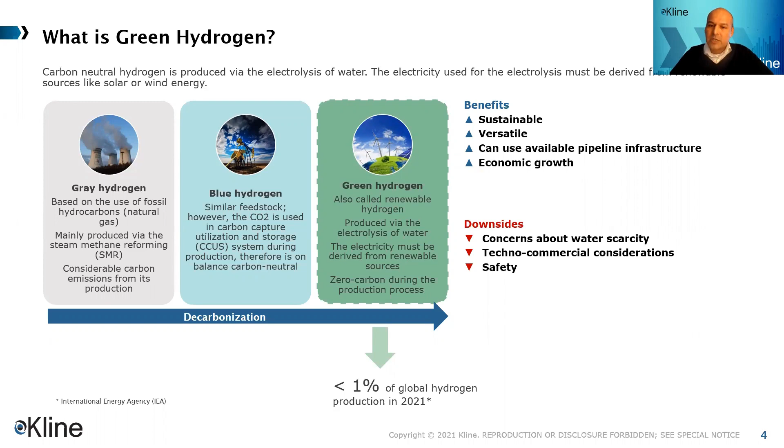That small production is what motivated European Union authorities. The EU has the firm determination to change that—to improve and increase that 1% or less of green hydrogen production. This is centered on their Green Deal, a renewable, more sustainable economy the EU aspires to have by 2050, to become carbon neutral.

At the first stage of this mega trend project, efforts would center on creating supply—building electrolyzer capacities expected to be about 6 gigawatts through 2024, and 2 times 40 gigawatts by 2030. Half of that would be in EU countries, and the other 40 gigawatts are planned for countries outside the EU, essentially Ukraine and Northern Africa.

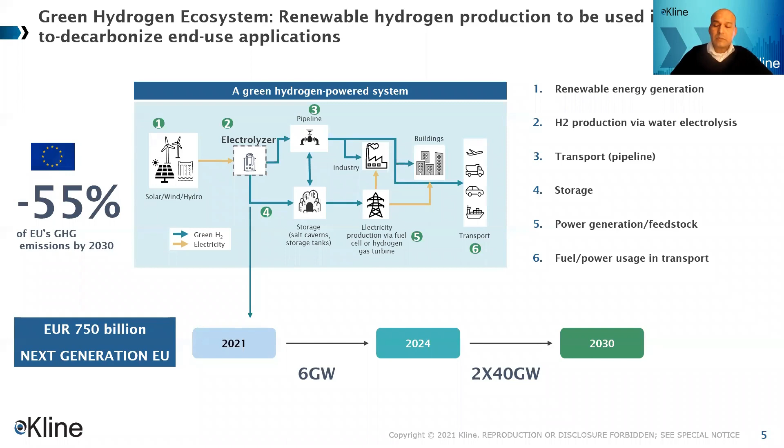Moving to the next slides, I'd like to give different answers on whether those projects are doable, viable, or could be materialized. Given the high level of uncertainty, we have around three different types of scenarios.

The base case scenario, shown in the upper left bar chart, in the middle, is basically assuming full implementation of current and future projects related to green hydrogen production within the EU energy transition framework.

Assuming all that happens, the base case scenario counts on production of 10 million tons of green hydrogen by 2030, shown in the right upper chart, and about 50 million tons of green hydrogen by 2050. This is quite a challenge, and our preliminary estimates indicate that an annual capacity of about 50 gigawatts will be required to meet those targets.

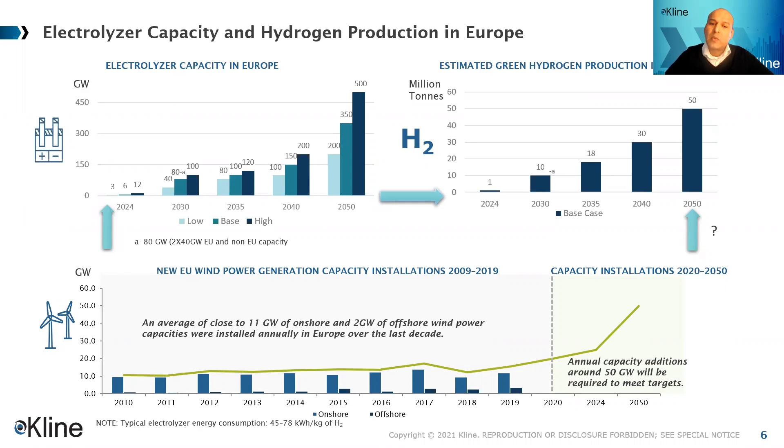We are talking about only the additional capacity coming from wind turbine energy. This is quite a challenge, and as you can see in the bottom of the chart, you can look at the annual average addition of wind energy in Europe over the last decade. It's just been about 11 gigawatts of onshore and 2 gigawatts of offshore wind turbines. So certainly that's not a really easy task.

However, the European Union, with these announcements and these very ambitious plans, have created propitious market conditions where we can see that already some changes are happening. That's created a lot of interest for a diversity of stakeholders participating in the market, embarking on a number of projects and consortium platforms in a concerted effort from different players, from private entities, energy companies, utility companies, all gathered under one single umbrella of a European Union institution.

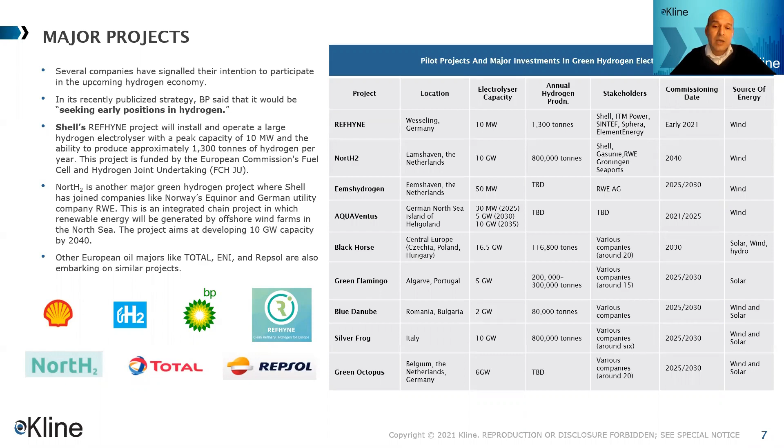Interestingly enough, some of those projects have been named after a color or after an animal. So you can see here in the tables projects like Black Horse, Green Flamingo, Silver Frog, for example.

And now, what is really the impact of green hydrogen energy, and what is going to happen when they are used by those different types of end users? That's important for us from the perspective of the finished lubricant market standpoint.

So there will be, as with anything, a coin with two faces, a positive and a negative one. On the negative side, we could expect a market contraction that's already happening, especially in areas like industrial lubricants, where we see a declining trend, basically happening because of the transition from thermal generation to renewable power generation and related operations like coal and coke mining, for example.

In the area of automotive, we can see that green hydrogen applications and fuel cell vehicles, which I'll show in the next slide, will also have the potential to eliminate the use of certain early adopting, early decarbonizing sectors, as in the case of freight trucking, and especially in the case of engine oils and heavy-duty motor oils.

On the positive side, I think that will be of interest for most of the audience. We have a growth that will be not only in terms of volume, but also in terms of value. In terms of volume, we'll see generated amounts of synthetic products related to the production of renewable wind and solar energy that will be needed for feeding those electrolyzers to produce green hydrogen.

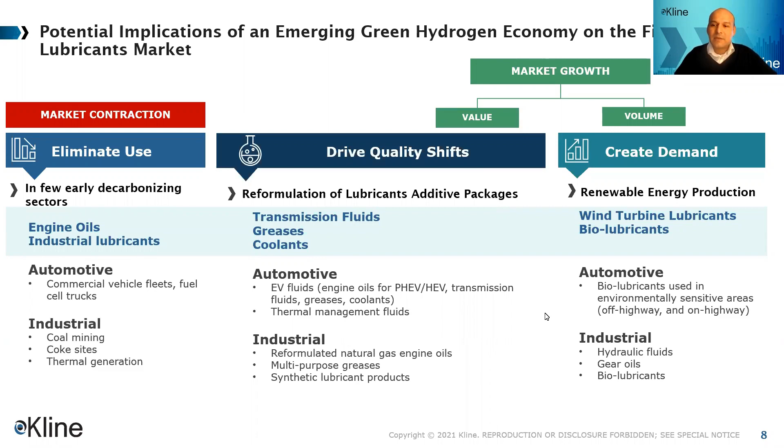Power generation's market pull is not as high, but the technological barrier is less of an impediment. Nowadays, hydrogen is already being used together with natural gas in blends for power generation.

The second end use is trucking. Fuel cell vehicles are already available, and it's a mix of market pull because of corporate social responsibility policies and also a level of subsidies or incentives.

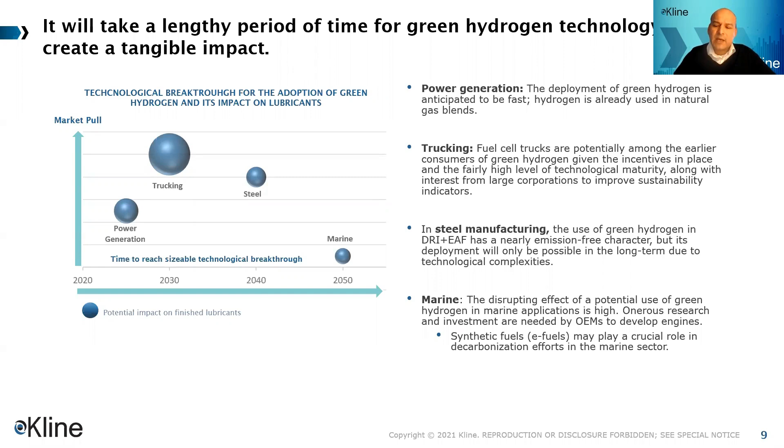The last two end users we assessed are steel and marine, and we believe those will be the laggards adopting green hydrogen in a later phase, mainly because of the technological challenges it poses. In most cases, our expectations are aligned.

Now let's look at each individual end use and the immediate effect of green hydrogen. In the case of natural gas, that's not new—natural gas together with hydrogen has already been used in power generation. The only thing is the level of participation of those plants is still low, from 10 to 20% green hydrogen, with the rest being natural gas. But the ultimate goal is to increase the proportion of hydrogen in those plants.

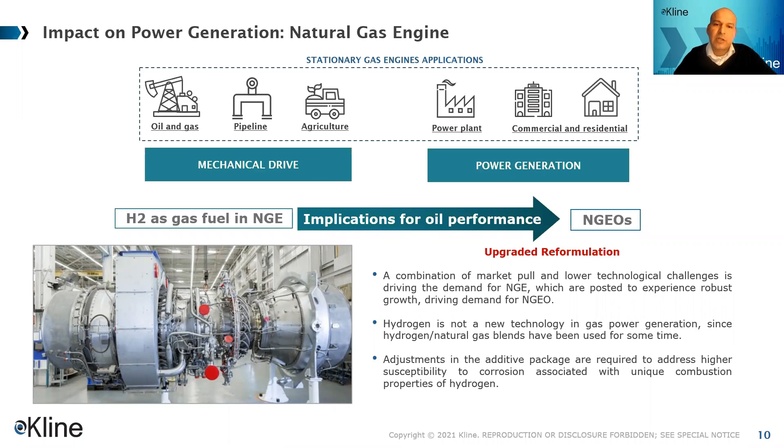When it comes to the technological complexities related to combustion and flammability issues with hydrogen, we anticipate it may be necessary to reformulate natural gas engine oils to tackle corrosion considerations and fix or tweak the additive packages used, especially because hydrogen combustion is clean and lean and won't lead to soot formation. Therefore, we'd expect less need for detergent or dispersant additives.

Secondly, we have trucking, an area of high interest. Again we see two sides. On the positive side, it will require a number of dedicated EV fluids targeting thermal management and better protection of different pieces and powertrains.

On the negative side, our estimates suggest about 10 to 15 kilotons of heavy-duty motor oils could be lost due to increased penetration of hydrogen-powered fuel cell vehicles, expected to be around 45,000 in 2030, but that number is expected to increase to 500,000 by 2050.

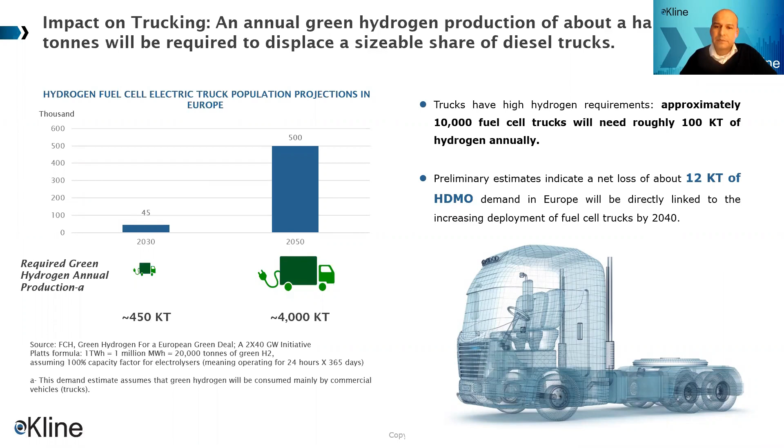In case of steel manufacturing, we analyzed this area because it's a very hard-to-abate technology. The impact on lubricant demand is not expected to be significant, just because the process of iron making and steel making is less lubricant intensive.

However, there will be some changes, indirectly connected to the deployment of green hydrogen, mostly associated with or derived from the equipment changes accompanying the shift from coal to green hydrogen.

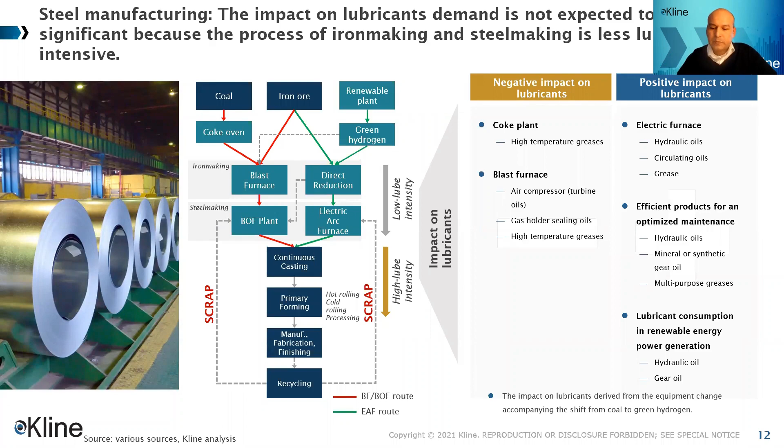One of the winning areas is wind turbine lubricants, because, as mentioned before, there will be enormous amounts of new onshore and offshore wind turbine energy necessary to feed the electrolyzers. We've calculated that about 1 to 2 kilotons per year will be needed for wind turbine farms.

Another indirect market that could benefit is biolubricants. Offshore wind turbine farms are expected to have the biggest demand or growth because of land shortages and environmental situations. Green hydrogen based on offshore wind turbine farms is expected to really expand, operating in North Sea areas. This can create demand for biolubricants because of international convention agreements protecting aquatic and oceanic environments.

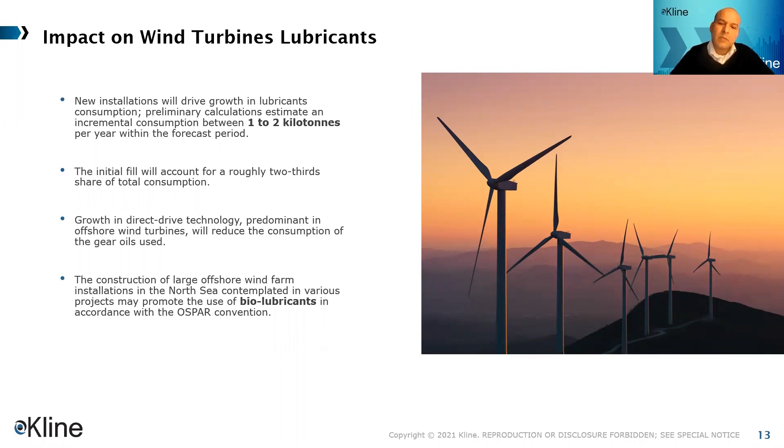In the case of marine, the last end use we analyzed, this market is still far away for green hydrogen, for many reasons. One of the most important is the enormous investment necessary to change OEM equipment in a highly regulated market, and green hydrogen is also competing with alternatives like biofuels or methanol.

Synthetic fuels based on green hydrogen seem to be a more viable alternative, not as fuel cells, which are already being used for small coastal vessels or onboard engines, but not yet at the largest scales.

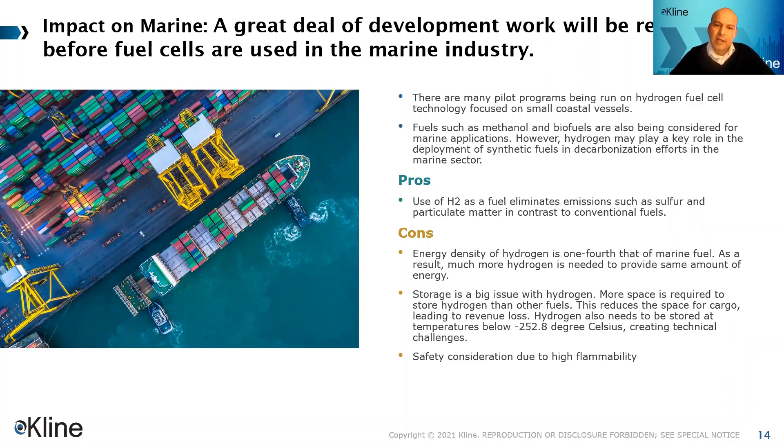Having said that, the core part of the presentation today is basically covering or focusing on Europe, but the green hydrogen energy revolution is truly a global phenomenon. So I would be more than happy to share some insights of the green hydrogen revolution for other regions in the world in the near future. You can see here what are the major undertakings being planned in different regions of the world.

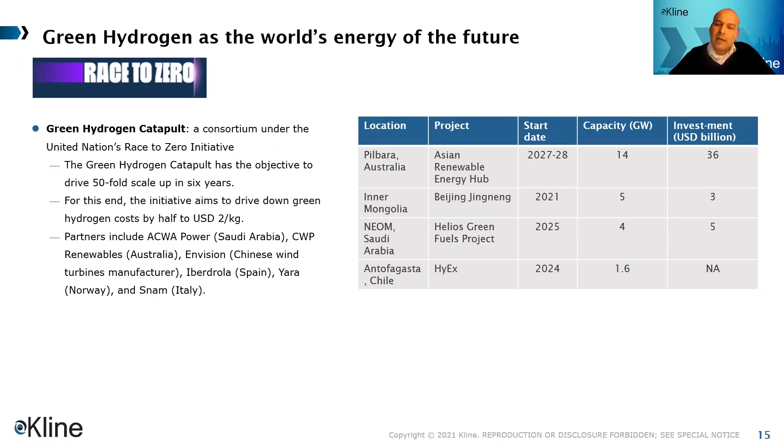Finally, I'd like to conclude this presentation by saying that the drive to zero carbon energy is here, and there will be a lot of opportunities for participants in the lubricants market industry. Lubricant products, as in the past, have had and will have major participation in maximizing the carbon mitigating benefits from green hydrogen energy. For that reason, market participants have to be very agile in identifying emerging needs and consumption points, whether opportunities for off-the-shelf products in growing areas connected to green hydrogen production, like renewable wind energy, or identifying opportunities in emerging market niches like electric vehicles. Players will also have to be agile in identifying evolving operational and business practices, identifying synergies with other transforming forces such as the digital economy, while looking for new business models.

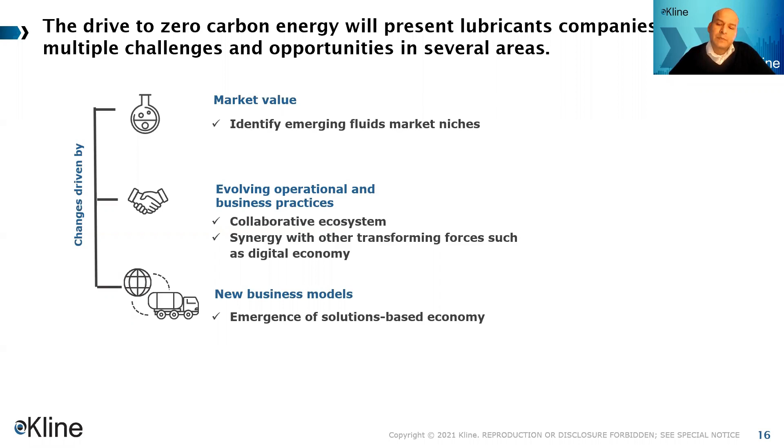Hi Charbel, again we have several questions, quite specific, but I'll start with one you can help with right away: what is more efficient, use of H2 in trucks via ICE or FCEV?